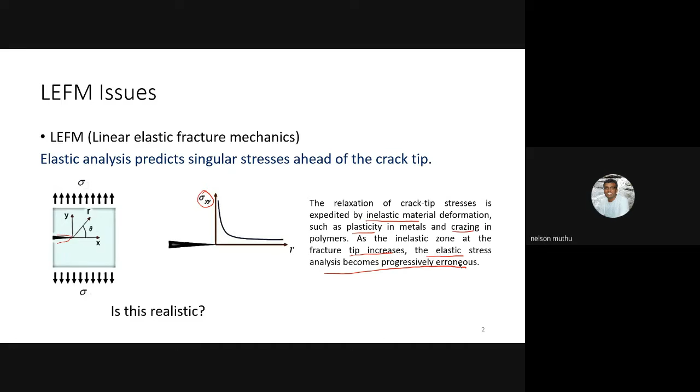So when modest crack tip yielding occurs, as I said, it is not a very highly plastic material, but you can understand it this way. It's a small scale yielding, or the size of the plastic zone is restricted to a small portion in the region around the crack tip. Okay, so that is what this term modest means here. It is a vague term, but what I meant is this.

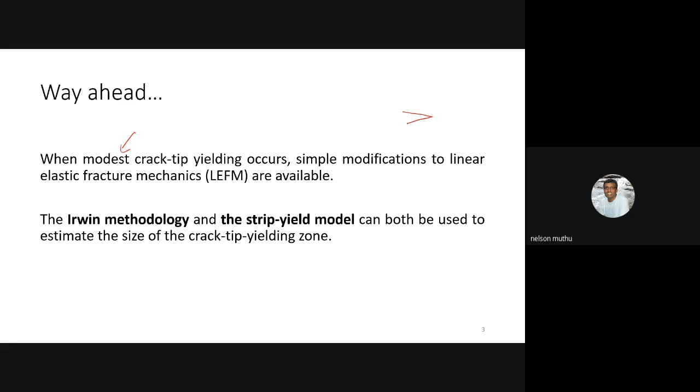So if you have a crack like this, and if you have a very big plastic zone, for example, something like this. These images are not to scale, but just to give you understanding, I'm drawing this. But if this is the size of the plastic zone, there are also materials where the size of the plastic zone is so small. So in such cases, these theories that I'm going to discuss for the next 2 hours are going to be useful.

So specifically, I'm going to focus on Irwin's methodology and the strip yield model. They can both be used to estimate the size of the crack tip yielding zone. So first, I'm going to focus on Irwin's methodology, how he understood the phenomena and how he took care of it. I'm going to present it, and then followed by the strip yield model. The strip yield model was independently proposed by 2 researchers, Dugdale and Barenblatt. So I'm going to also show those derivations as well. It is also interesting to show that Irwin's methodology and the strip yield model almost give similar results.

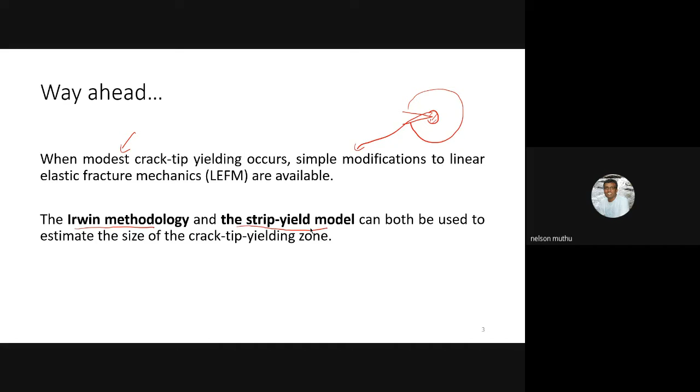Now, what is this Irwin's model? Basically, there are 2 classifications under Irwin's model. One is a first order estimate, and another is a second order estimate. The first order estimate is a very simplistic model, and then we are also going to see the second order estimate. So the first order estimate says this. As a first order estimate, I'm also calling this the first step. What it says is that we can assume that the boundary between elastic and plastic behavior occurs when the stresses satisfy the yield criteria. I repeat, the boundary between the elastic and plastic behavior occurs when the stresses satisfy a yield criteria.

This is something that we can very well appreciate. So here you see, in this case, we have the singular stress field using the linear elastic fracture mechanics framework. But if you take an elastic perfectly plastic material, in all the discussions for the next 2 hours, we are going to restrict ourselves to elastically perfectly plastic material. So what is this elastic perfectly plastic? If you see any non-hardening or elastic perfectly plastic material, the stress versus strain behavior is going to look something like this.

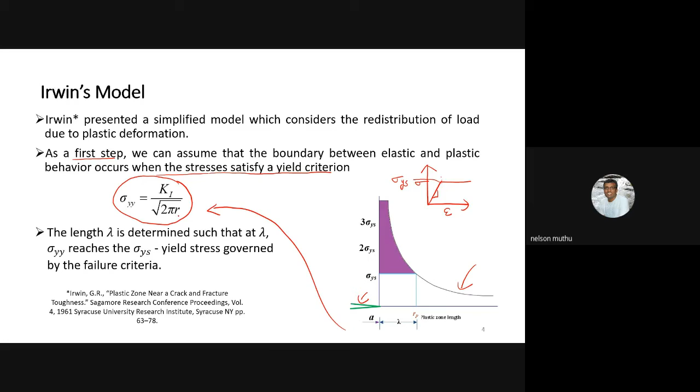Okay, so in that case, as a first step, if you were to find the length ahead of the crack tip, up to what length? So you see here, this is the crack. Up to what length it is going to exhibit plasticity, that can be very easily found out by using this equation. So what is this equation? You must be familiar with this equation, right? Sigma yy is nothing but K1 by square root of 2 pi r. So as you must have realized, when r is equal to 0, sigma yy shoots to infinity. That is why this stress field is called singular stress field, or sometimes it is also called asymptotic stress field, because it is varying asymptotic in nature.

So now, if you see, whenever the stress reaches the yield stress, whenever the sigma yy becomes sigma ys, then you would say that point is going to be the boundary point. Or in other words, that is the boundary between the elastic and plastic behavior. You see here, so this lambda is going to be the length of the region which is under this plasticity. So you can see here, because it is elastic perfectly plastic from the crack tip up until this point, or rp. So this rp stands for the distance from the crack tip where the plasticity ends. Where the material does not exhibit, henceforth from rp, the material does not exhibit plasticity. So that is what the term rp means. So we will use this rp and lambda again and again.

But you also can see here there is a term called a here. a denotes the length of the crack. Okay. So you can see here just at the point along the x-axis, that is at point rp, your stress sigma yy is going to be equal to sigma ys. Okay. So now this point is the boundary point.

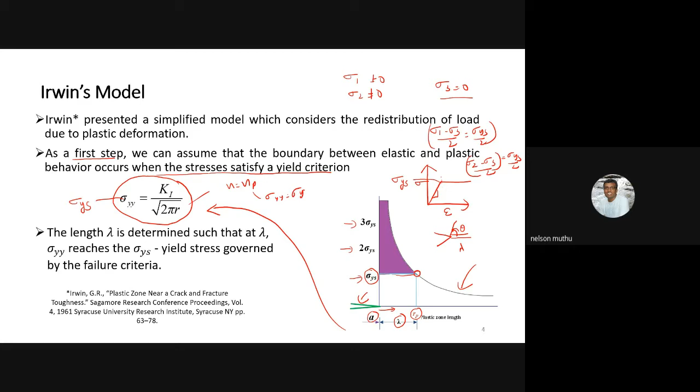So what I have covered in this slide is this. As a first step, we had to find out the distance along the crack line where the plasticity would end, or the material would only exhibit elasticity. So that point can be straight away found out by setting theta equal to 0 in the derivation of the stress field. And then whenever sigma yy will be equal to sigma ys, corresponding to that, you can find out what is the value of r. In this case, r will be nothing but rp. In that instance, your sigma y will be nothing but sigma ys. So now this sets the stage for the advanced theories.

So as a first order estimate, as I said to you before, once you neglect the strain hardening and for plane stress, the yielding will occur when sigma yy will be equal to sigma ys. Again, this is based on the Tresca's criterion, and sigma ys is nothing but the uniaxial yield strength of the material. So you can use this straight away. You can use this relation K1 by square root of 2 pi lambda. This will be equal to sigma ys. Okay, so from there you can estimate what is the value of lambda.

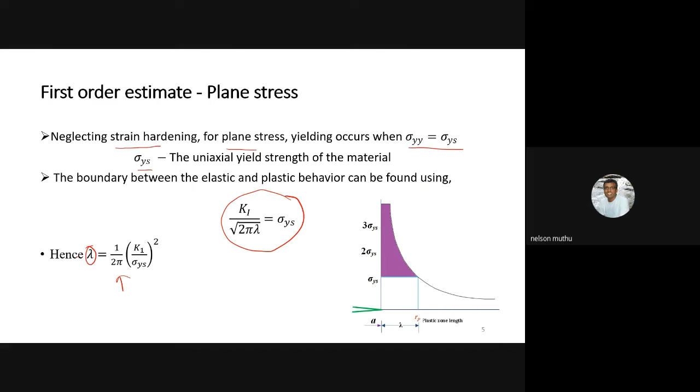So that means what? Once you know the SIF, then you will be in a position to find lambda. Okay, and because SIF is something that is very characteristic of a material in LEFM analysis, SIF and also yield stress, then you can be in a position to find out lambda. Okay, so this lambda is nothing but the region along which you can see that the material exhibits plasticity in that region.

Right. As you know, in solid mechanics or strength of materials, it is important that we satisfy the equilibrium equations when we try to solve the problem. Specifically, the equilibrium condition was not able to be satisfied because of this. If you see this carefully, in the case of a crack in the elastic material, if you solve using LEFM approach, then this would be the stress field. What you see here, this is the elastic stress field. But because of the first order estimate, in the presence of elastic perfectly plastic material, the highest stress that we could achieve is the yield stress of the material.

And if you see this carefully, in the portion lambda in this region, there is some contribution of force due to sigma yy. So the hatched portion that you see here is going to give rise to some force, which is not taken into account in the case of the first order estimate, because you see the elastic stress field starts from almost infinity and then it drops down, but the sigma ys, the elastic perfectly plastic stress, starts from here. So there is some loss of force contribution due to the elastic perfectly plastic analysis in the first order estimate, which should be accounted for. Otherwise, where would we account for this force contribution due to the hatched portion? So that is going to be the rectification or redressing of the first order estimate, and it gives rise to the second order estimate.

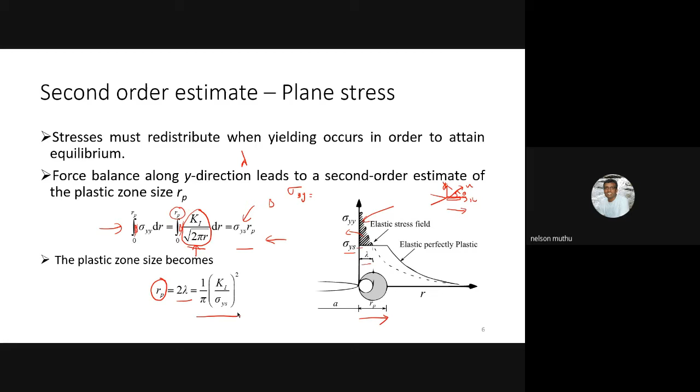Okay, but what do we do next? How do we proceed ahead with the analysis? So we proceed ahead with finding a new crack length. See, earlier in the elastic analysis, the crack length was A.

And please note that the SIF is only defined in the LEFM framework. If you go for plasticity, inelastic behavior of the material, or if you want to analyze non-linear elastic materials like hyperelastic materials, there SIF does not make sense at all. There we have to make use of the concept of energy release rate.

Okay, so if you want to make use of this SIF, that means you can only make use of that in that LEFM framework. But what you have now is a methodology, Irwin's methodology specifically, where we brought that sort of ligament into picture and we compressed all the plasticity in that ligament. Okay, so once we develop that mathematical model, the question remains, can we in any way bring these LEFM principles to apply to this model? Now, how can we do that?

This can be done by defining a new crack length. How do we define the new crack length? Irwin proposed that in the presence of plasticity, if this is the crack length A, naturally, because of plasticity, the region around the crack tip is going to become a little soft. That is because the material is flowing due to high stresses. So now the crack faces slightly will become like this. The displacements are going to blunt, it is going to actually expand a little more than what was before in the case of elastic material.

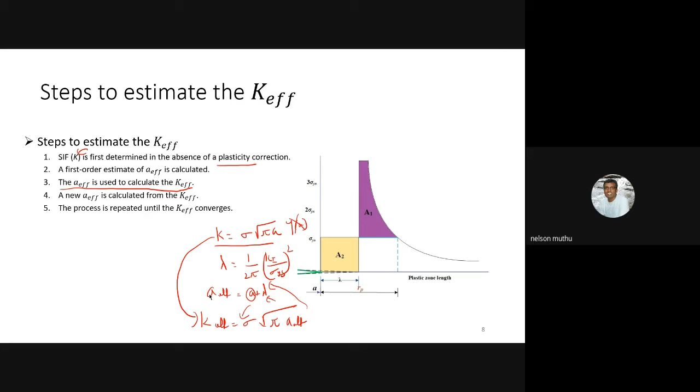So what is this SIF? Sometimes in my class when I talk about SIF, students understand that it is something similar to SCF, stress concentration factor. SCF does not have units, but SIF has units. We use megapascal root meter. So the SIF is something that we can understand as a kind of scaling factor. It is a parameter that tells you the power of the crack. And once the crack is powerful, you will see the stress field around the crack is also influenced by that parameter. So that is how SIF is.

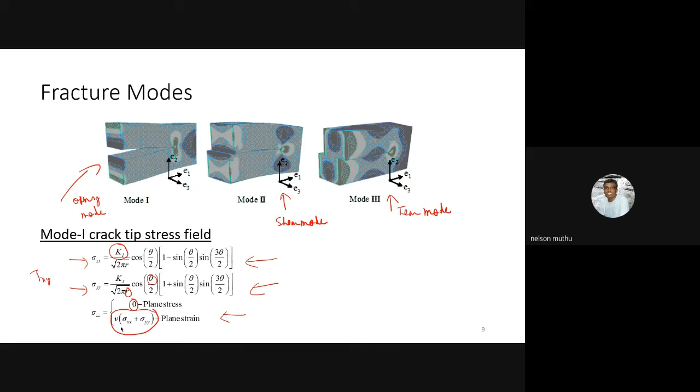So you can use various criteria. Tresca criterion has been routinely used to determine the shape of the plastic zone theoretically. In some cases, people also use von Mises criterion. In fact, if you see carefully, in the von Mises criterion there is a clear distinction between plane stress and plane strain, and therefore it becomes very easy to represent that as well. So here I will show both the Tresca criterion as well as the von Mises criterion. Based on these criteria, how will the plastic zone shape look in the case of mode 1, mode 2, and mode 3.

Okay, Tresca criterion. If you have principal stresses sigma 1, sigma 2, and sigma 3, you will have to find the maximum of the differences of these stresses: (sigma 2 minus sigma 3) by 2, and then (sigma 1 minus sigma 3) by 2. You will have to find the max, and that should be equal to the shear stress at the point of yielding when you conduct a uniaxial tensile test. Okay, so that is going to be sigma ys by 2.

Okay, so in the case of plane stress, the third principal stress, sigma 3, is going to be equal to 0. So naturally, if you bring in this expression, sigma 1 minus sigma 3, which in this case is sigma 1 minus 0, should be equal to sigma ys by 2. Therefore, your sigma 1 is nothing but sigma ys. So this has been the basis for us to find the plastic zone correction factor in the case of the first order estimate. We also said that if sigma 1 is equal to sigma ys, let us see carefully along theta equal to 0, because that ligament is our focus, along theta equal to 0 degrees.

So if you put theta equal to 0 degrees in sigma x and sigma y, then both are going to be equal. So you see here, when sigma 1 is equal to sigma 2 is equal to sigma ys, if that sort of condition is imposed, then you can get the plastic zone correction factors for plane stress. But what about plane strain?

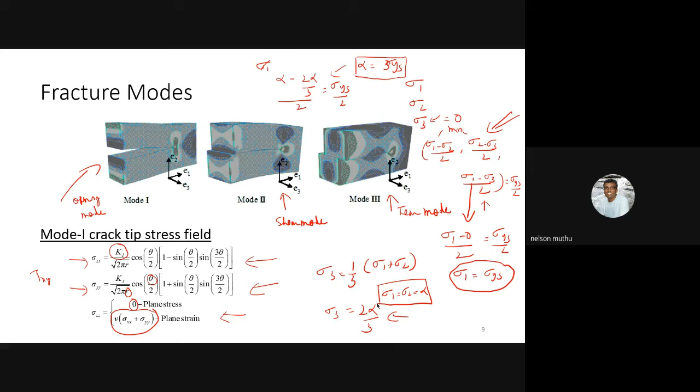So now again, from these expressions using the Tresca condition, if you put the value of sigma 3, it is going to be alpha minus 2 alpha by 3, divided by 2, is equal to sigma ys by 2. If you solve this, alpha is going to be 3 times sigma ys. Alpha is sigma 1, so sigma 1 equal to sigma 2 is equal to alpha. That means you have to reach 3 sigma ys for your material to yield in plane strain, whereas in the case of plane stress, your sigma 1 has to be equal to sigma ys.

That is why the size of the plastic zone is reduced. You see here, only this region, this lambda, is the region where sigma 1 or sigma yy reaches 3 sigma ys. So when K1 by square root of 2 pi lambda is equal to 3 sigma ys, you get lambda as 1 by 18 pi times K1 by sigma ys whole square. Whereas in the case of plane stress, lambda was 1 by 2 pi, K1 by sigma ys whole square. That means your plastic zone size in the case of plane stress is much higher, almost 9 times higher than what you see in the plane strain case.

So what is its implication? When you want to design some material using the strength of materials approach, how do you design it? We always have this notion: if the material is big, then it is able to withstand load. The factor of safety for that material is quite high. Therefore, we can comfortably design the material so that we can avoid failure. If you have very high dimensions of the material, that is the norm in strength of materials or solid mechanics.

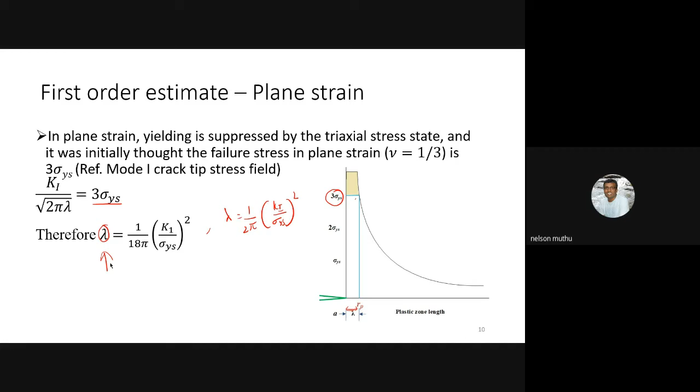Less amount of energy is available for the propagation of crack in thin materials. Whereas in thick materials, because the size of the plastic zone is relatively smaller, more energy is available for the formation of crack faces. That is why the crack propagation rate is higher in thick materials and lower in thin materials. Anyway, we'll come back to it later at the end of the lecture. But what you have to realize is that the size of the plastic zone, lambda, here is 9 times smaller than the size of the plastic zone in plane stress, using first order estimate.

Now, there was a problem. The problem was that Irwin, when he was doing some more work, found out that the stress at which the yielding stops is not 3 sigma ys. Oh, there is a typo here. It is 3 sigma subscript ys. But it is lesser due to the following factors. Why is it lesser? Because the crack tip blunts due to the plasticity, and the tip acts as a free surface.

What is its implication? When you have a blunt crack, and you have sigma xx as 0 on the free surface, it's a free surface, right? So therefore your sigma xx is 0. That means the effect of sigma xx is felt along the crack line to some distance. So what is the result of this? That means the principal stress in the second or third direction is relatively less. It is approaching the plane stress kind of situation. Okay, so because of this crack tip blunting due to the plasticity, sigma xx goes to 0, and therefore, using

the Tresca criterion, the stress that is required to initiate the yielding is much smaller than what we had used in the previous derivation. So it was found out that the failure stress was estimated to be around 2 root 2 sigma ys. How we got that, we will not look into. But for a moment, just take it for granted that this is the value at which the material yields, that it experiences up to this value.

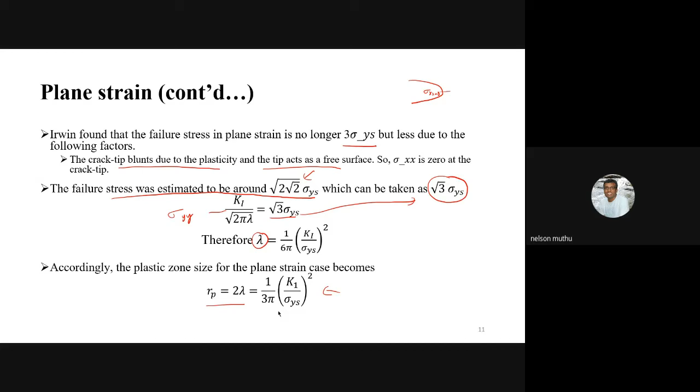Now I want to also show you the shape of the plastic zones. For the shape of plastic zones, we consider the principal stresses, sigma 1, sigma 2, you can see here. It is not very difficult to actually obtain the principal stress. And sigma 3 is going to be nu times 2 K1 by square root 2 pi r for plane strain.

So what I'm going to do is show different shapes of the plastic zone using the Tresca criterion as well as the von Mises criterion. In the case of the Tresca criterion, I use this expression: sigma 1 minus sigma 3 is equal to sigma ys. Sigma 3, in the case of plane strain, will be non-zero.

It is not necessary that one has to use sigma 1 minus sigma 3. Sometimes we have to use sigma 1 minus sigma 2. We have to see which is smaller, whether sigma 3 or sigma 2 is smaller. Accordingly, we have to use the equation for yielding to find the shape of the plastic zone. Once you use the equation sigma 1 minus sigma 3 is equal to sigma ys, you are going to get an expression like this for plane stress or for plane strain.

So this r_y of theta, what is this r_y of theta? This is going to tell you at what distance you are going to have that boundary. So basically, I'm going to plot the boundary of the elastic-plastic region. On that boundary, the material is going to yield. Outside that boundary, the material is still under an elastic stress field.

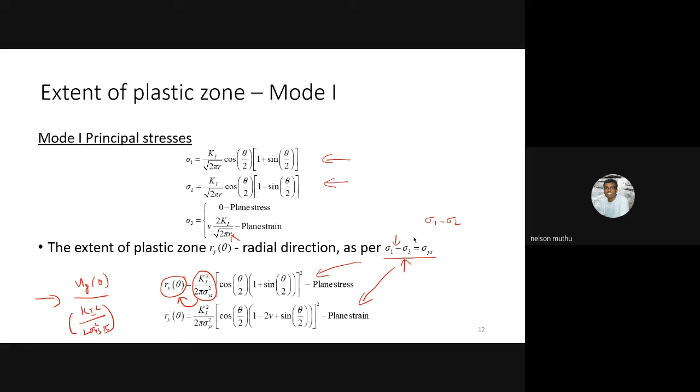Again, making use of this Tresca criterion, I will plot for sigma 1 minus sigma 3 is equal to sigma ys. I will also plot for sigma 1 minus sigma 2 is equal to sigma ys. You can see that, this is going to be the shape of the plastic zone. For plane stress, as we have already seen, the size of the plastic zone is comparatively higher than in plane strain. In plane strain, if you use the sigma 1 minus sigma 3 criterion, you can see the size of the plastic zone is so small, whereas if you use sigma 1 minus sigma 2 is equal to sigma ys, it is slightly bigger.

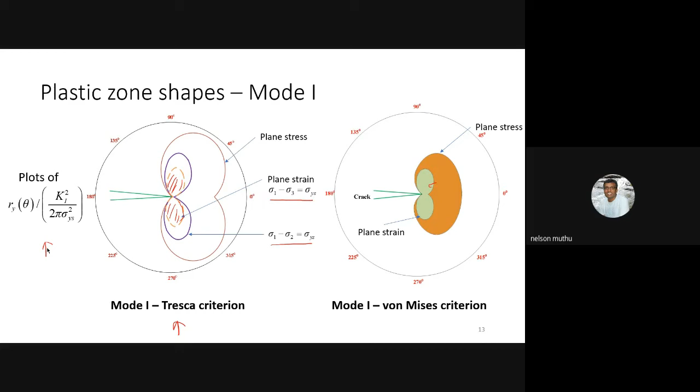Essentially, what we have to see here is that the size of the plastic zone in plane strain is much smaller than in plane stress. This is for mode 1 with the Tresca criterion. Whereas if you use the von Mises criterion, that is straightforward. For plane strain, this is the size of the plastic zone. For plane stress, it is comparatively higher. Again, you have to note that these are all normalized values: r_y of theta by K1 square by 2 pi sigma ys square.

Similarly, we can also plot for mode 2. See here in mode 2, we have plane strain. Again, we need to establish the principal stresses. From the principal stresses, you need to make use of the von Mises criterion in this case. So you see the plane strain plastic zone shape is relatively smaller than the plane stress plastic zone. In the case of mode 3, it is one circle.

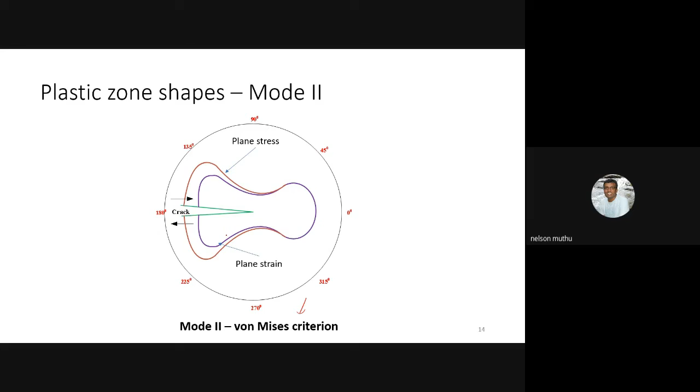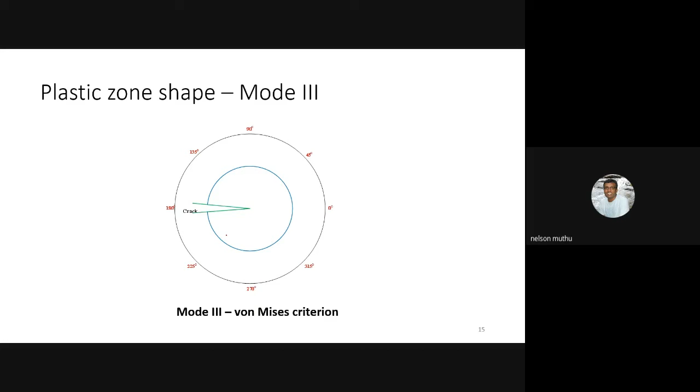That is by virtue of how we get the stress field solution ahead of the crack tip due to a mode 3 crack. And you can see that it is a circle. The von Mises criterion will give you a circle. So that will be the shape of the plastic zone.

So now Irwin saw the things from one perspective. Essentially, the idea was that if you could do a plastic zone correction factor for the crack embedded in elastic perfectly plastic material, we can be in a position to use LEFM principles. In the first instance, he equated the stress to the yield stress and found the value of lambda, but the equilibrium condition was not getting satisfied. Therefore, we had to do the second order estimate, and he obtained the value of rP. Once he obtained rP, he found that rP is nothing but 2 lambda.

Then he had to extend the physical crack tip by a fictitious amount, that is lambda, in such a way that the equilibrium condition is still satisfied. The equivalence is established on both fronts. On one front, we can still apply LEFM principles, therefore we can find the SIF for the extended crack. Also, there is an equilibrium between the extended crack and the elastic singular crack tip stress field. There is an equivalence. In that sense, it is not violating the equilibrium. At the same time, it is able to extend the crack by lambda and accommodate the LEFM principles in that framework.

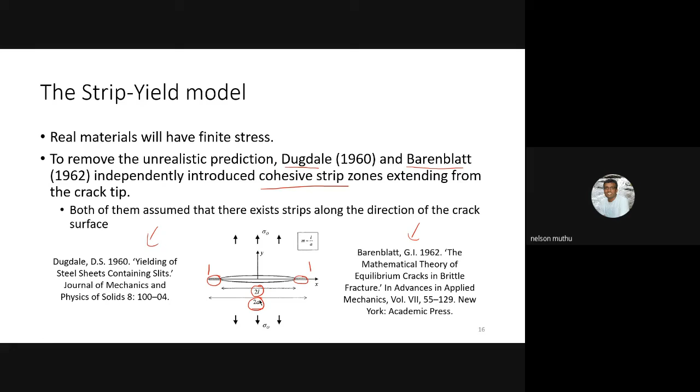So now how do we find this strip length? What they did was they assumed certain things. As I said before, it is another perspective of looking at things to bring in this plastic zone correction factor so that we can still use LEFM principles. These are the assumptions they had. Plastic deformation concentrates in a line. So there are two strips at either end of the crack tips. It is essentially a central crack inside an infinite geometry. The plastic deformation is only confined to those strips, and it is suitable for thin plates. That means they have only derived this model for plane stress scenarios, and the material is again elastic, perfectly plastic. It has been found that the materials respond very well to the Tresca yield criterion.

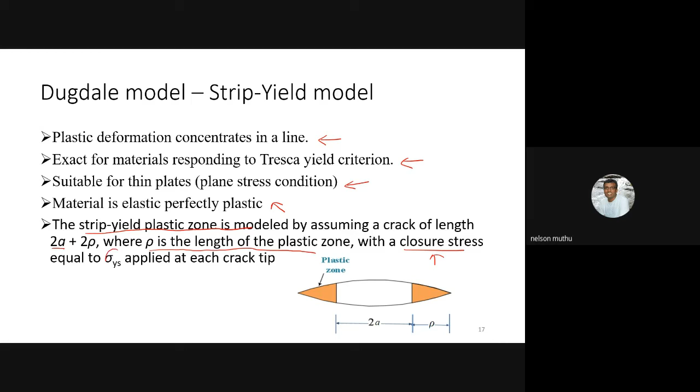Now you see here, the strip yield plastic zone is modeled by assuming a crack of length 2A plus 2 rho. 2A is the physical crack, and 2 rho denotes the summation of the lengths of the strips on either end. So rho is the length of the plastic zone with a closure stress. There's a new term that has been brought into the picture, closure stress. What is this closure stress? I'll come to it later. This closure stress is nothing but the yield stress applied at the end of each crack tip. Now, going into the Dugdale approach, initially they had a full crack, that is 2A plus 2 rho. There was this linear elastic material, and they had a crack of length 2A plus 2 rho.

Okay, so this is the first part of the problem. In the next part of the problem, what they did was they applied closure stress. Again, it's an elastic problem, but here it is subjected to external load, far field loading of sigma. But in the second scenario, they have applied a closure stress, sigma y as yield stress, at either end of the crack tip. Now you see, when you superimpose this plus this, what you are going to get is this.

So it's a very interesting way of looking into a problem. Rather than actually solving the elastic, perfectly plastic problem and the analysis of a crack embedded in it, we can decompose that problem into finding the behavior of a crack embedded in perfectly elastic material, but with certain loads, as I already showed you. This is also shown in this figure.

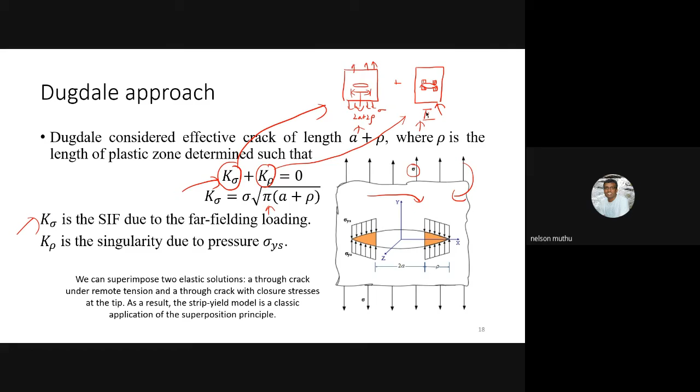Now, having known the solution, is it possible to find the SIF in the second case, meaning this scenario, when the crack surfaces are partially loaded with sigma ys at either end, at the extremities? If you see this carefully, yes, it is possible. Why not? Here you have load intensity. Now we are going to distribute the load intensity, add some more loads, and for each of these loads, you are going to have K1, and we are going to add them. That is how it is.

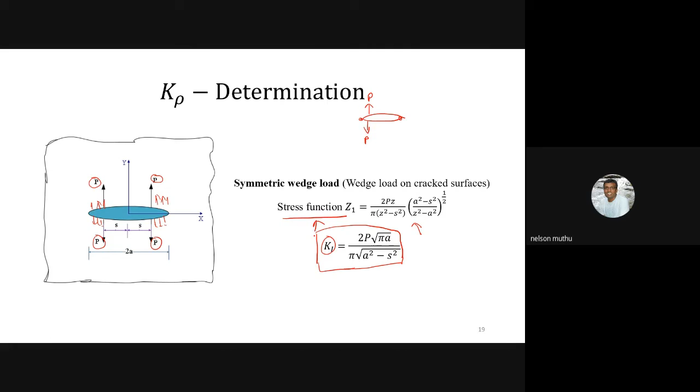But here it is a tensile concentrated load intensity, whereas what we have here is compressive. It's a closure stress. That is why it is called closure stress. It's trying to close the crack. So you see here, in place of P, what did I put? Sigma ys ds. ds is the infinitesimal crack length, and sigma ys is the closure stress acting on that strip. So nothing special. I have replaced P with sigma ys ds and K with dK rho.

And if you observe carefully, this closure stress is only from A to this.

Okay, so it is A. From here it is A, and this length is rho. So you can see it is only loaded from A to A plus rho. If you integrate dK rho from A to A plus rho, you are going to get an expression like this.

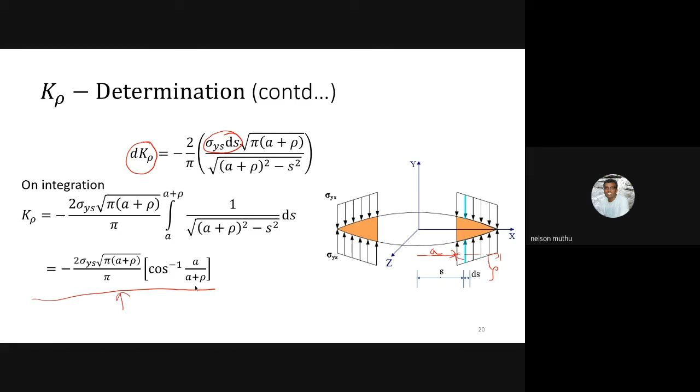So this is going to be the SIF associated with the closure stress. And we also had the SIF associated with the far field loading for a central crack of length 2A plus 2 rho. But according to Dugdale approach, even if you look at Irwin's methodology, our idea is to nullify the singularity. So that is why we have put an expression like this: K sigma plus K rho is equal to 0. When you substitute these expressions for K sigma and K rho, you are going to get an expression like this.

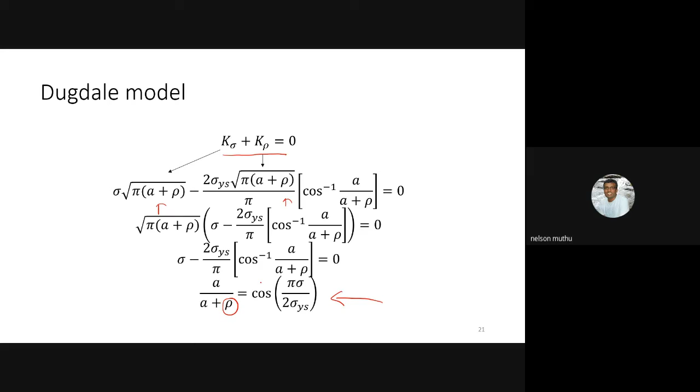Now, if you look at this expression carefully, we are interested to find this rho. So how can you find rho from this? It is a slightly complicated expression. Therefore, we are going to make a small approximation that the far field loading is much less than the yield stress, and the length of the strip is much less than the half length of the crack. If you make use of this assumption, you are going to get an expression like this.

Finally, you realize the length of the strip in the case of Dugdale model is equal to pi by 8 (K1 by sigma ys) whole square. It is almost equal to RP. So this is nothing but RP in the case of plane stress, second order estimate. So pi by 8 is approximately equal to 1 by pi. So finally, what we are able to show in the case of plane stress is that both the Dugdale model and Irwin's methodology give similar results.

Then what is the difference between the Dugdale model and Irwin's methodology? One difference is that if the ratio sigma by sigma ys increases, there is going to be some sort of difference, because this sort of approximation cannot be used. So then the results are going to deviate. And I'll also show you one more difference in the effective crack length.

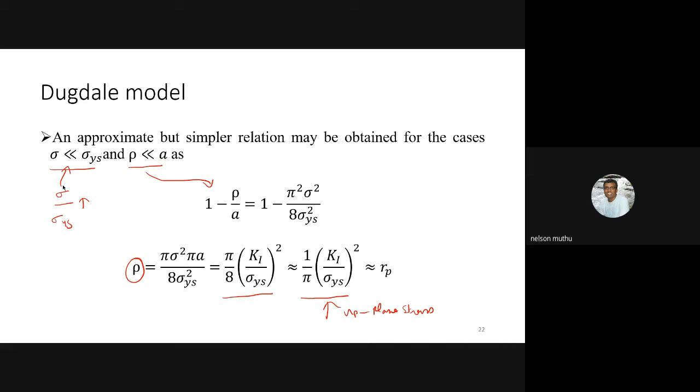So a summary: for the first order estimate, we have this as the value of lambda, and for plane strain, this is what we had. And for Irwin's model, the second order estimate, we had RP as twice lambda. Because of the crack tip blunting, we got this value, 1 by 3 pi (K1 by sigma ys) whole square. Once you consider the effect of crack tip blunting, you will get this expression. And for the strip yield model, the length of the plastic zone RP is going to be pi by 8 (K1 by sigma ys) whole square.

So as I said to you, there is a difference in perspective. The way Dugdale and Barenblatt approached the problem to include the plasticity in that strip was slightly different from the way Irwin included it. Now, I already said that in a scenario where your far field loading is almost equivalent to the yield stress of the material, then the Dugdale model and Irwin's model are going to differ. So that is one difference.

The second difference is the effective crack length. You see, in the case of Irwin's model, the effective crack length is A plus RP by 2, or A plus lambda. Whereas in the case of the strip yield model, the effective crack length is A plus RP. There's a difference. Or it is approximately equal to A plus 2 lambda. Now you can ask why this apparent difference. As I said to you, these are all models. In order to make use of the LEFM principles with ease, in spite of plasticity, such models have been introduced.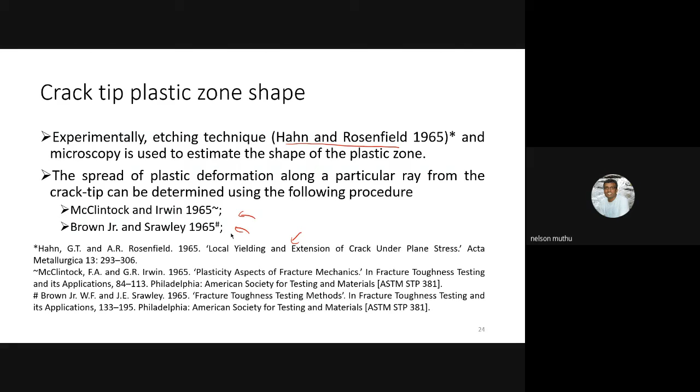The last part of the lecture is on the effect of plastic zone shape along the thickness of the specimen. How does it affect the shape of the crack propagation? So if you take a thick specimen, and you have a straight through crack, and if you apply a tensile loading, how does the crack propagate?

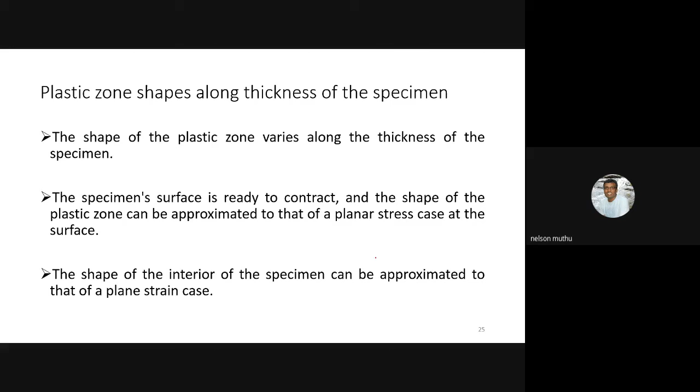So you can see here you have a through thickness crack. The crack front is a straight line. Let us say under the action of tensile loading, it is allowed to propagate. What would be the shape of the crack front? With time, how does it evolve? See, on the extremities, on this surface,

let us say this is the z-axis, pointing inwards. So the surfaces which have the z-axis as a normal are going to behave like a free surface, because there is no external traction on the free surfaces. The surface that is visible to you, one in front of you and one behind the specimen, behaves like a plane stress surface. It is subjected to a plane stress condition.

Why am I saying that? Because sigma zz, the applied traction in that direction, is going to be 0. Therefore, close to the surface, one principal stress is 0, so your material is behaving like a plane stress. If the material is behaving like a plane stress, the size of the plastic zone will be considerably higher.

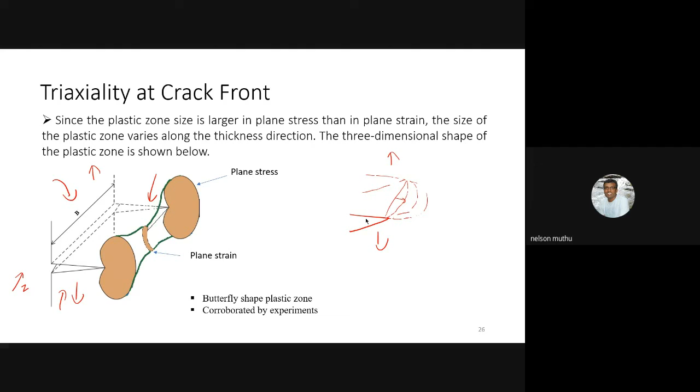So with this, I will stop. Irwin's model and Dugdale's model have been completed. If you have any questions, you can ask me. Yeah, it is exactly 6:30 now. Perfectly timed, Dr. Nelson. Thank you, Sachin. Participants, if you have any specific questions, you can ask Dr. Nelson.

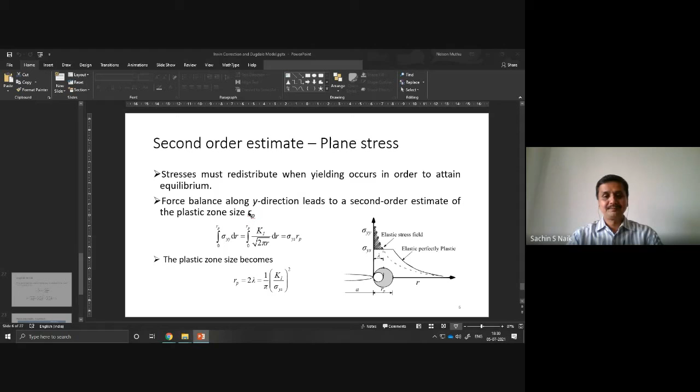Dr. Rukhande, you raised your hand in between. Perhaps you have some question for Dr. Nelson. Dr. Rokhande, are you around? Okay, he may not have any question. Any other participants who have any question for Dr. Nelson now? It seems none of them have any question. But you can always write to me if you have any questions.

Share again. What you wanted to see? Who was that? Just a moment. There was one comment from Subhash Khetre. Oh, he is asking about some other link. No, it is not about a question or something.

On behalf of all the participants, I'll ask you one question, Dr. Nelson. If you see Irwin's correction, then he writes that a effective is equal to a plus lambda. Can you please repeat the rationale for choosing lambda equal to rp by 2? Okay, so I'll just share the screen again.

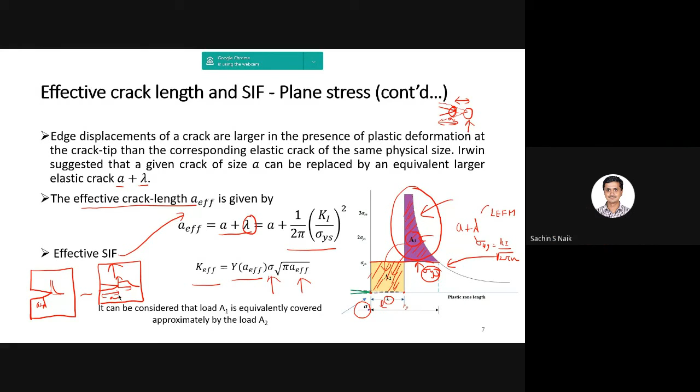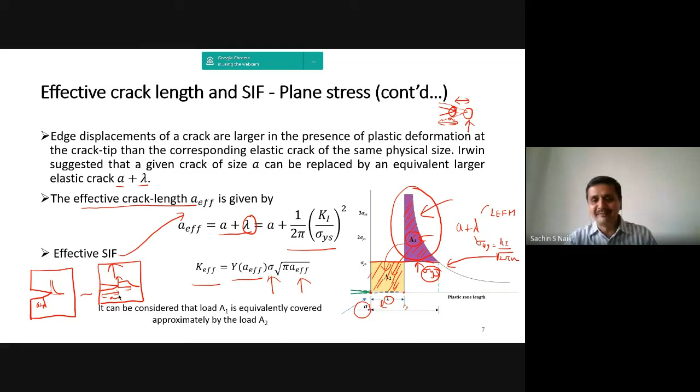Thank you for the question. Thank you also, participants, for the time. Dr. Nelson, there is a question from one participant. He says, does isotropic behavior influence the crack propagation?

Isotropic behavior influence the crack propagation? See, essentially the crack propagates when your SIF K is greater than or equal to the critical SIF, K_IC. So that is how it is. If you look from this perspective, the material properties don't come into the picture in K_I, whereas K_IC is a material property. Now K_IC, whether it depends on the isotropic material or not, we cannot say, but definitely K_I is not a function of Young's modulus or material constants. It is independent. So in that sense, crack propagation for a crack in a linear elastic material should not be affected by the material constants. However, K_IC is a material property.

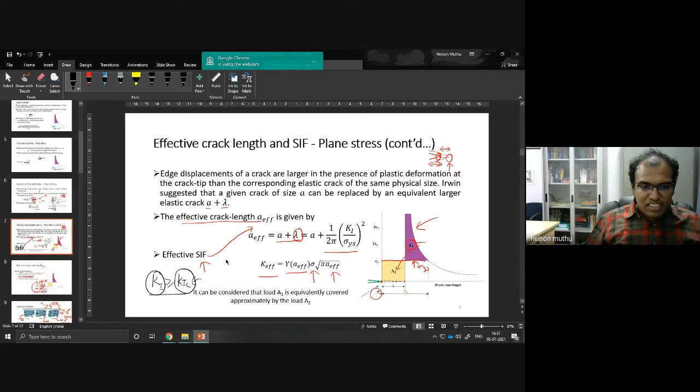One more question has been written in the chat box now. He wants to ask what effect occurs due to hardness. What effect perhaps on K_IC or K occurs due to hardness? That's what he is expecting perhaps. Oh, okay. Yes, there is a good correlation between hardness of the material and the fracture toughness. Yes, that is a good question. In fact, there are certain literatures that show that they are correlated well. So if you are able to find out hardness for a material, you will also be in a position to estimate the fracture toughness K_IC. But the exact relation, I'm not sure, but it is there.